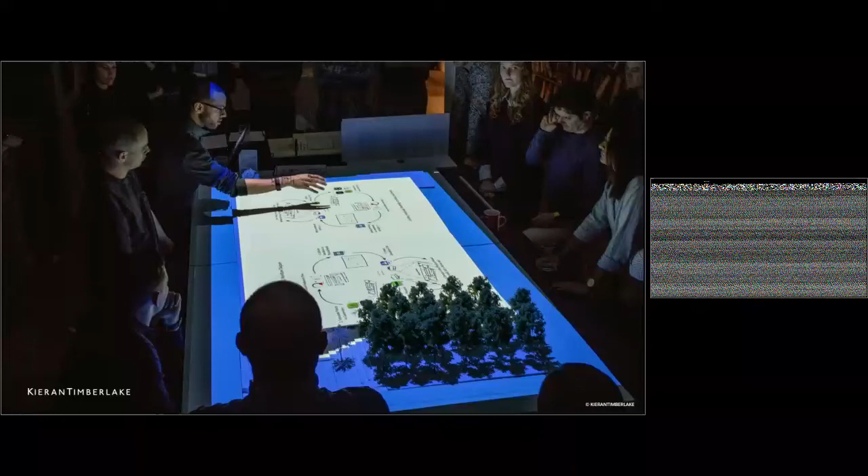My pleasure to introduce tonight's speaker. Before I do that, I just want to acknowledge one really significant detail of the arrangement here tonight.

Since 2013, we've been able to bring to the college a Barber McMurray professor. This is a result of a generous endowment provided by the local firm Barber McMurray Architects. So Blanche Barber and current personnel at Barber McMurray have combined to endow a $1 million gift to the College of Architecture and Design, which has allowed us to bring a significant internationally recognized architect to teach here in the college essentially every other year.

So in 2013, the very first Barber McMurray professor was Larry Scarpa of Brooks Scarpa in Los Angeles. And then we had Wendell Burnett, the Phoenix architect here. So just to say to the folks from Barber McMurray who are here, thank you very much, formally and publicly, for this amazing support. It's part of what helps differentiate what we do here at the University of Tennessee and brings great value to the student experience. So thank you.

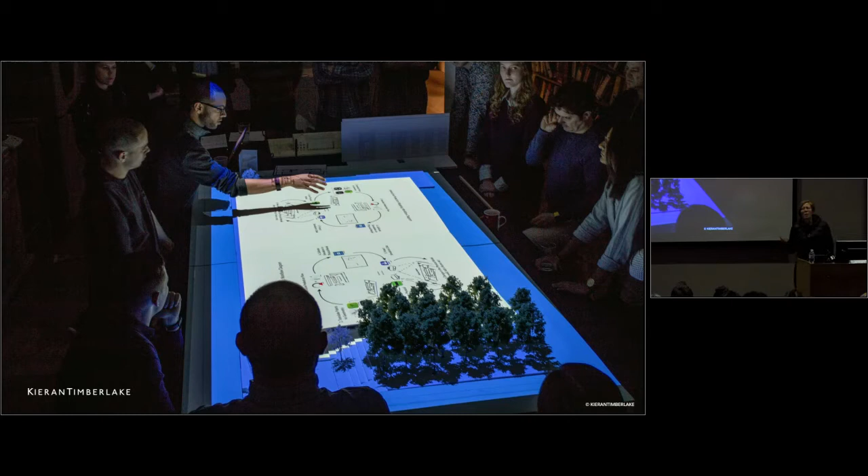If you came to our office and spent time with us, you'd see that every day we're asking how far we can extend the boundary around what we include and exclude when we design. You might see us out on the sidewalk doing things like this on a day-by-day basis. We have projects, clients, schedules, but day-to-day it's what you choose to do and how you choose to design that matters. When you allow an entire group, organization, or community to embrace questioning as part of the core infrastructure of the design process, wonderful things happen - you begin to ask really primary questions.

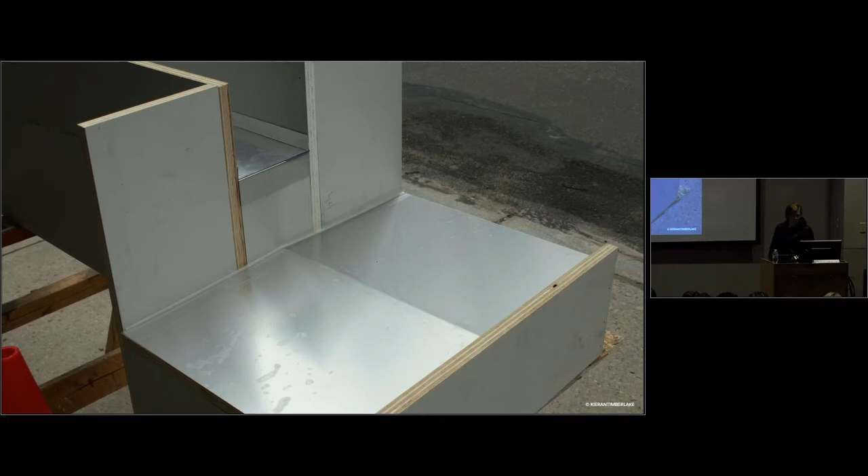That's an interesting thing. You might also find us out front on the sidewalk doing experiments like this, especially in summer - running a very quick mock-up to understand water flow across a specific surface. It's what I'd call a low-fidelity prototype, just to ascertain the slope of a surface and the speed at which water flows across it.

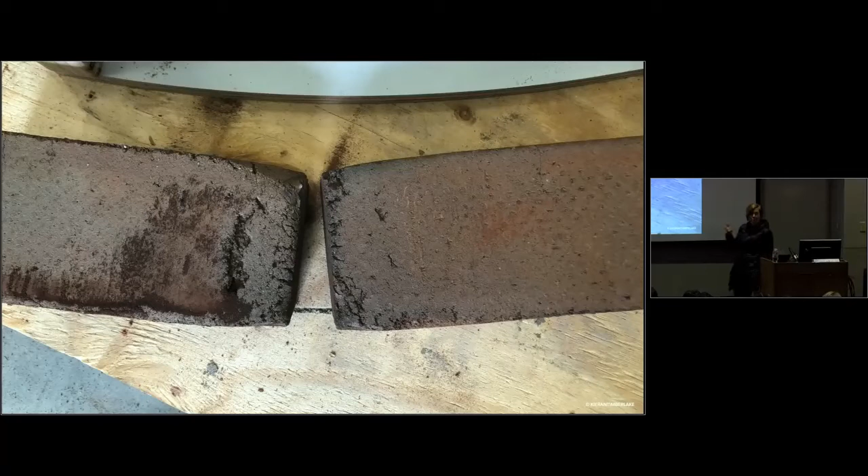More recently, just two weeks ago, we were working on masonry mock-ups in our shop with members from the International Masonry Institute - masons who came in. We were asking a really basic question; I'd almost call these sketches with bricks and mortar, about the head joint on a curve.

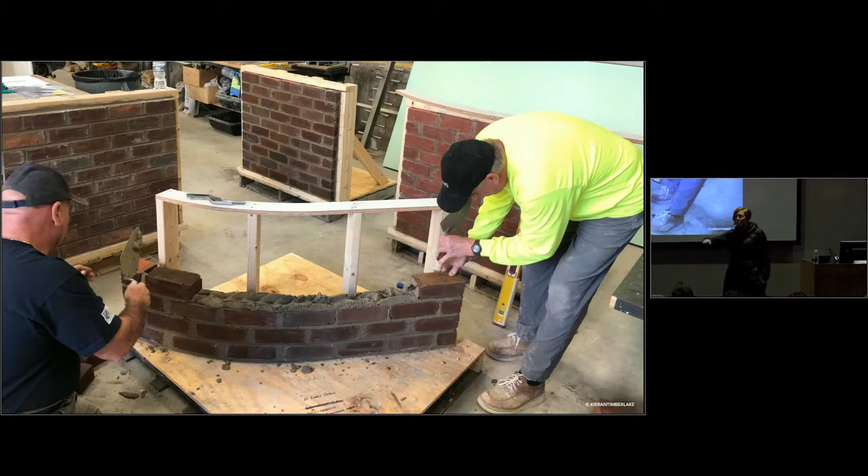And while we had an incredibly high fidelity Revit model, and we were running scripts that would allow us to adjust these head joints, we also wanted to create a prototype and go through the entire process of working with those joints as well. So we were simply using our shop as a space where we could build and work through these types of details.

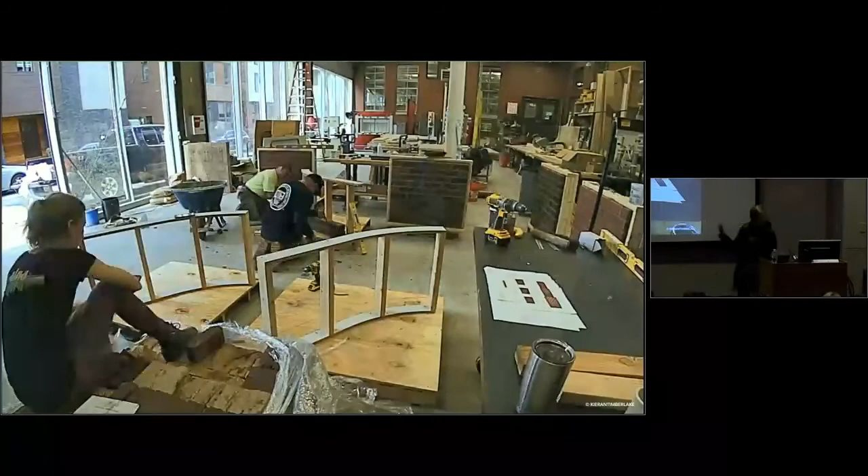I don't know, would you call this research? Does that word unsettle you a bit? Does it confuse you? If I say searching and searching again, does that feel more comfortable to you?

The truth is, I deeply believe there has never been a more pressing moment than now to test the boundaries of our design agency. And there's a reason for that. When we design, our power lies in the ability to inscribe a boundary around what we are going to include and what we're not going to include.

One of the things we're working on is really trying to understand that boundary. And one of the things we work on at Kieran Timberlake on a day-by-day basis is trying to understand the boundary that we're drawing around what we include and what we exclude, and how deeply we can understand design as a multivariate endeavor.

So when we go to work on a building like this, which is the U.S. Embassy in London, the day-to-day working out of the U.S. Embassy in London over a 3.5, 4-year period required, yes, a lot of design, as you can imagine, but also a lot of slowing down, vetting questions, extending our knowledge, going into areas that may feel a little uncomfortable.

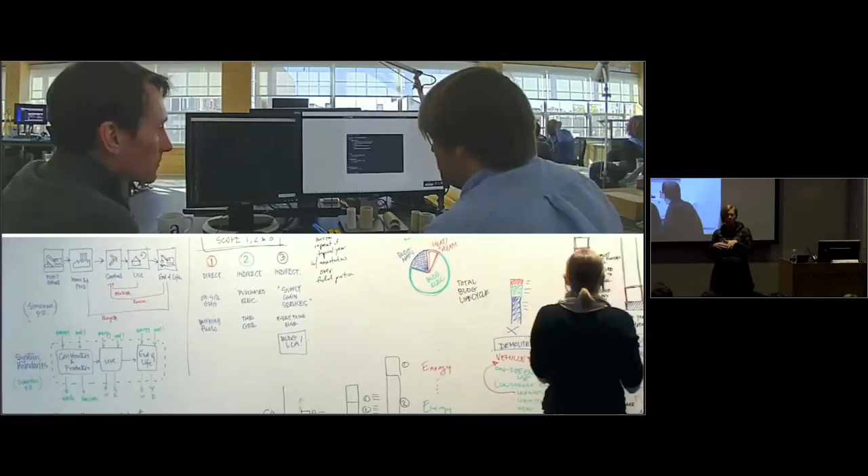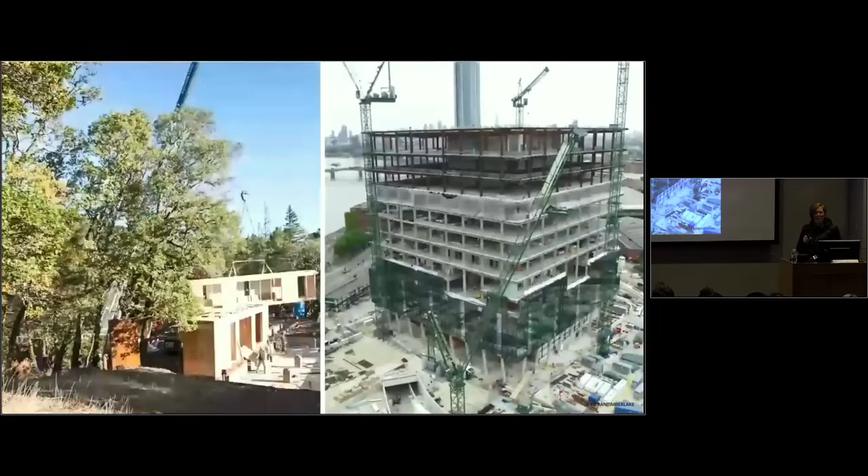You can't tell exactly what's happening. That's because we have an integrated process. When we do projects, all of those folks are at the table all at once. Everyone's there all at once, and so our projects have a tendency, yes, to look like buildings, but also to look like software, to look like scripts. I think the more important thing is that our projects have a tendency to range scales, to range concerns. We focus on certain parts of building delivery methods. We can focus on whole entire buildings.

The other observation you can make is, wow, all these questions do require a whole range of different methods to solve them, which means that, in order to extend our agency, we've had to develop those methods. So we have matured a platform of methods and techniques. Ours is a multi-method approach.

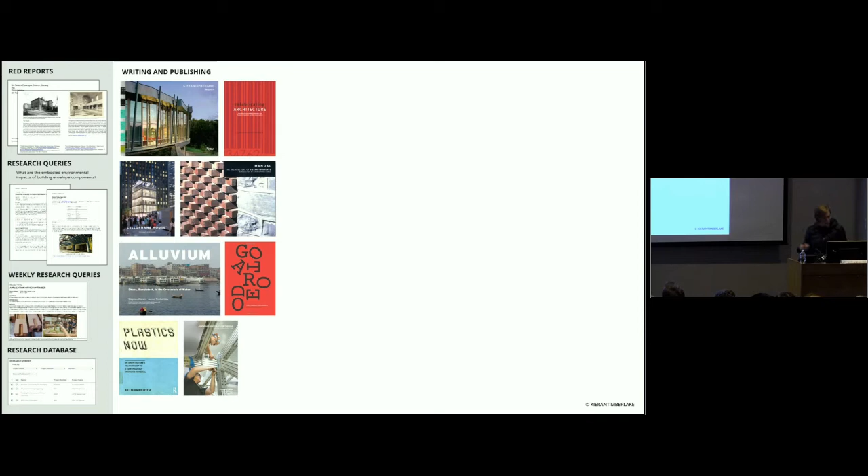We can find all of these findings in a database. But we also have ways of communicating our work, obviously through our books. It's an important part of our work is to build up discourse, especially through books like Refabricating Architecture.

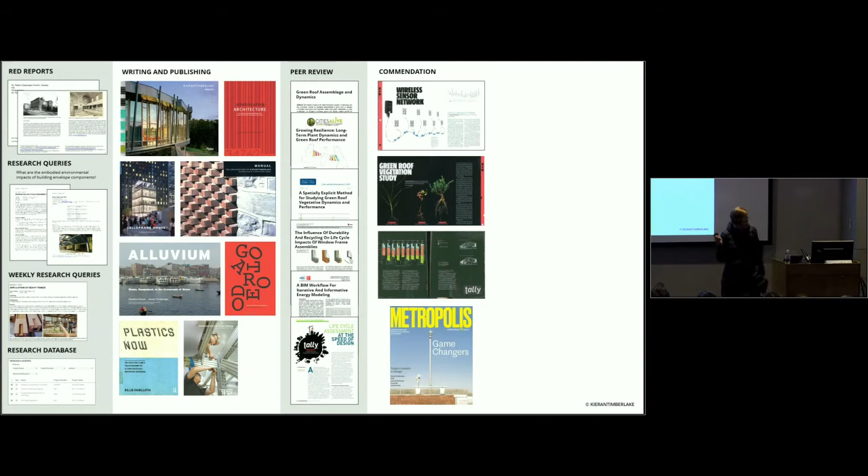We also seek review. We seek to expand the work we do out into a community of architects. That's important—share your work. We seek commendation for our work, and increasingly we seek to extend the questions we've asked into the creation of tools.

Tools that can be distributed into the profession. A simple question we began to answer in 2013: how do we calculate the embodied environmental impacts of our choices? When I select this carpet, when I select this wood base, can I bring this layer of decision making into the design process to understand what it means to pick that wood and that carpet from the point of view of embodied environmental impacts—meaning emissions to land, air, and sea.

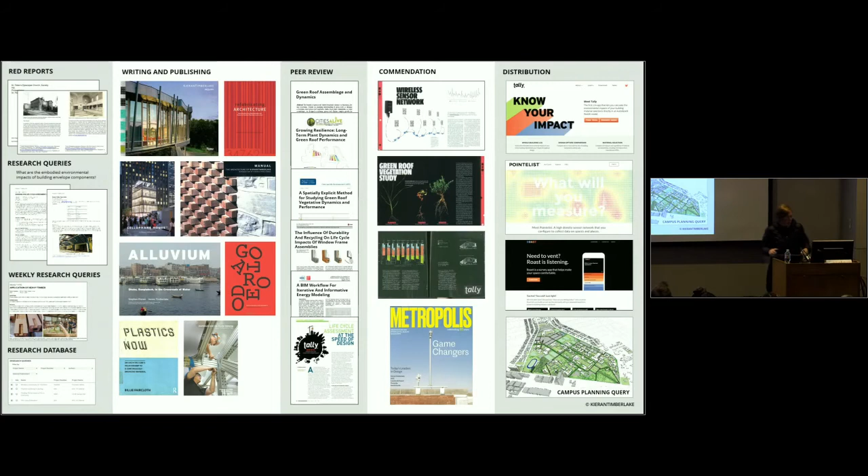Can I understand that? Once we realize we can create an environment for designers to access that data as they're designing, we can create a design-integrated process. We also begin to understand that we have a responsibility to take that novel process and make it so everyone in our profession can engage with it. Many of the questions we ask are ones other designers want to answer too, so we can distribute those.

Our milestones—and I put this slide in because I want to impress upon the students in the room that our practice, what we have worked towards, and what I've personally worked towards in my career, is designing a practice. So our milestones are intentional.

We pursued a transdisciplinary practice. We pursued a practice where research would be a process, ISO certified, meaning we can write down what we say we're going to do, look ahead and do what we say we're going to do, then look backwards to see if we did it. It's just a plan, do, monitor, learn process.

It was intentional to create a transdisciplinary group, to hypothesize that that was necessary and needed in the profession, and to go after the creation of that group.

It was very intentional for us more recently to formalize a collective intelligence-based staffing model, so that a project team no longer looked like just 'the architectural project team,' but a diverse grouping of individuals with different types of knowledge that could represent the core strengths of KieranTimberlake. This is intentional.

We were able to achieve these milestones because we intended to design a practice this way. If you build up research as a mode, and have the capacity to use research to extend your agency, you have a way of working across days, months, and years using this mode. I've had ten years of working through this mode, seeing how it plays out, and I'm now in a position of reflecting on how it has worked and what it has allowed us to do.

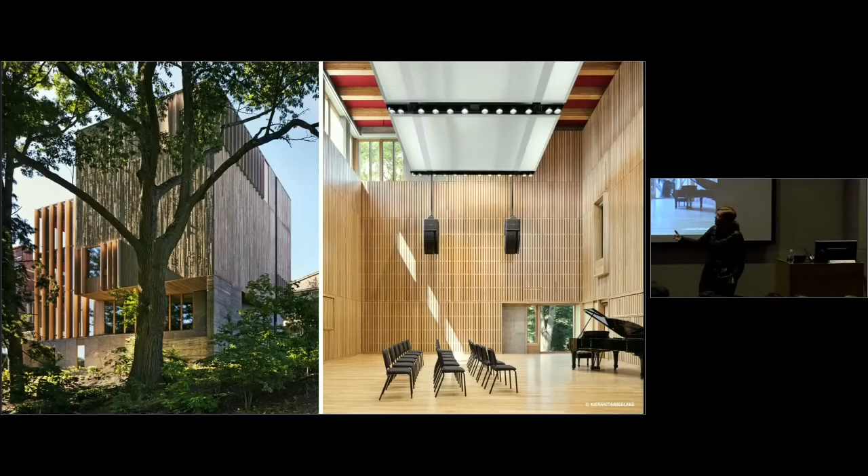We were interested in answering this question because part of the team—you talk about alchemy, Jason, you pulled that quote out earlier—part of the intuition we were using, and one of the reasons we were interested in the concrete, is because we wanted to create a bark-like texture on the concrete. Not a literal impression of bark, but a bark-like texture. The impression of wood on the exterior, and the true expression and performance of wood on the interior, in this volume where we have musicians and vocalists practicing on a daily basis.

So we started like this. We started the design iteration like this around design development. You can step back and look at these and say, these look pretty clunky, Billie. What's going on? What's going on here is that we're developing our tacit knowledge.

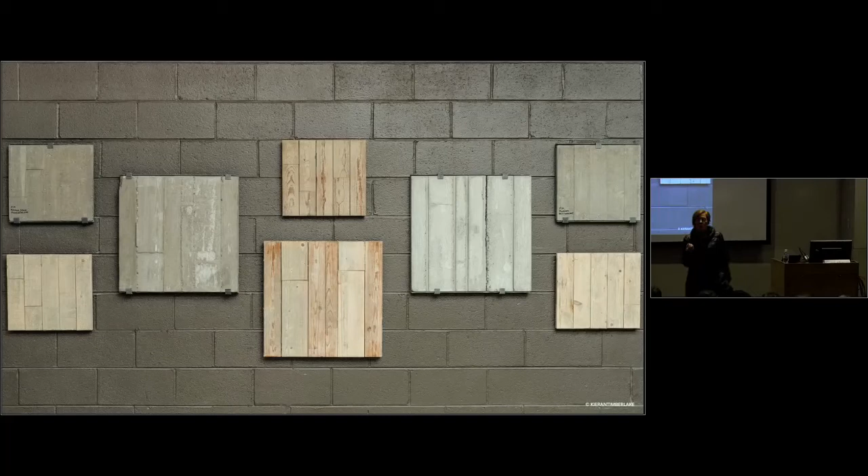We were working with concrete mix design. We were simply setting up a series of samples that would allow us to understand those variables. Each of these samples has boards at different depths relative to each other. The surface finish is slightly different—some are sanded more, some sanded less, which allows the summer wood configuration to press through on the concrete a little bit more. We also have board spacing going on, thick and thin.

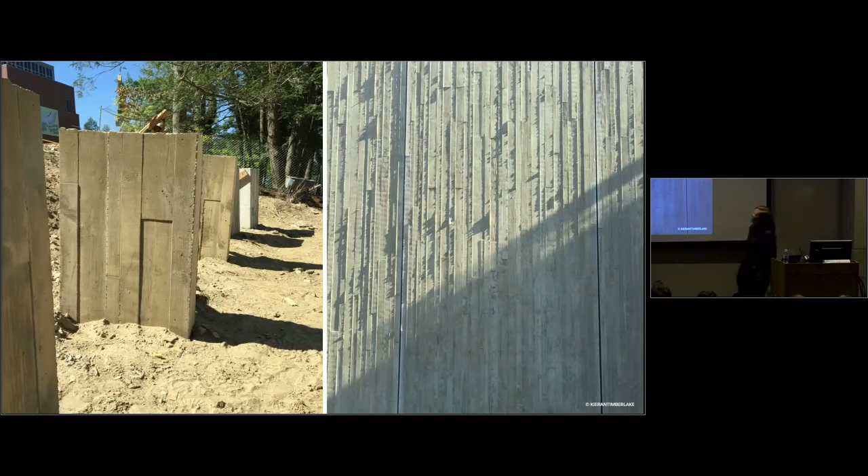But these were our first samples, which turned into tests that were initially done on site, over here on the left, by the contractor who looked at our samples. We had a discussion with the subcontractor, and there was an attempt to recreate those samples. But once we saw them on the site, we realized, no, this really isn't it. So this is the finished one on this side—this is what we were after.

So what this turned into was realizing that we needed to do a study in randomness. We needed to look at thinner boards, thicker boards. We really needed to begin to understand how to leverage this pattern.

This is when we introduced a script. After we had understood the variables we were working with and what mattered to the expression of the concrete, we were then able to better target a script that allowed us to search for a series of random patterns. We were then able to export those surface patterns and also test them, visualize them, in order to look at and study the shade-shadow conditions.

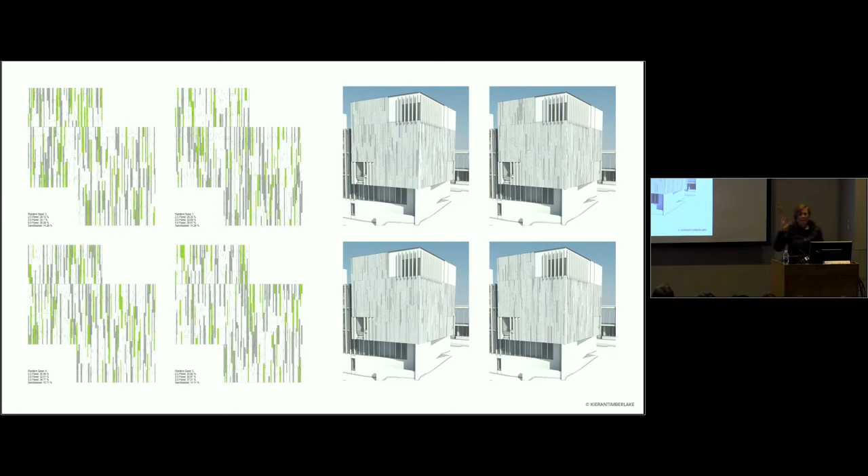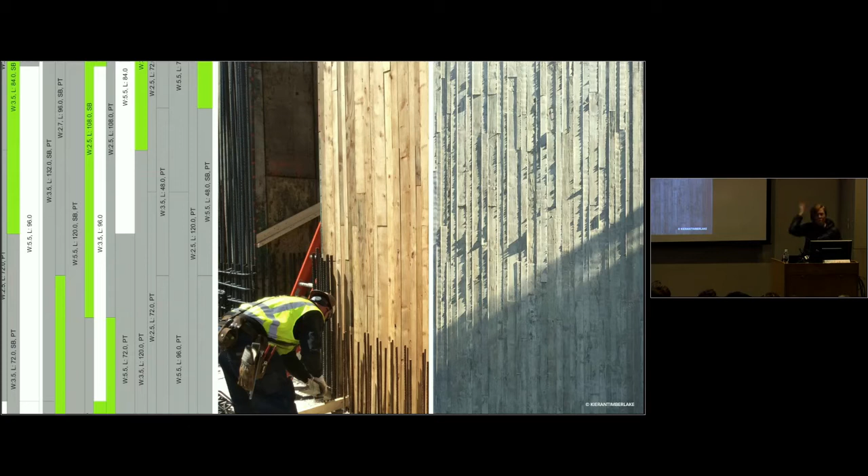What was really great about this process is that once we began to produce these almost paint-by-number drawings, they became the means by which we could communicate with the contractor. The contractor started really getting involved in helping us create new notations and refine the script we were working on, and it resulted in a series of shop-like drawings that were the means of communication—all resulting from these early explorations with these prototypes.

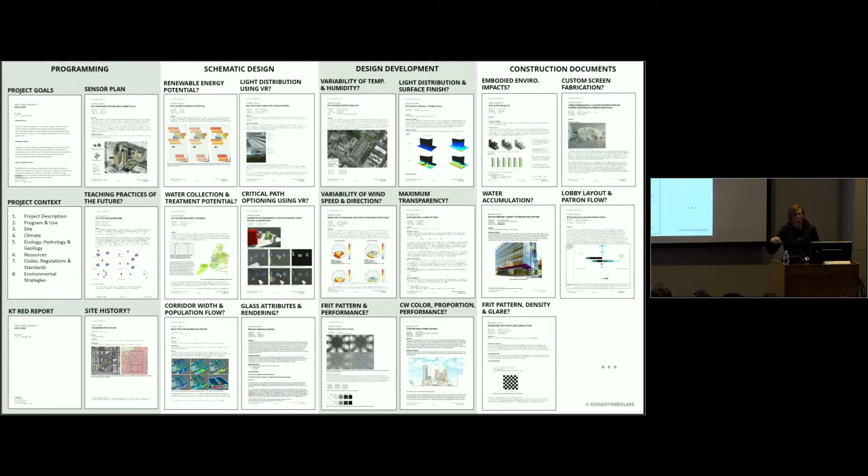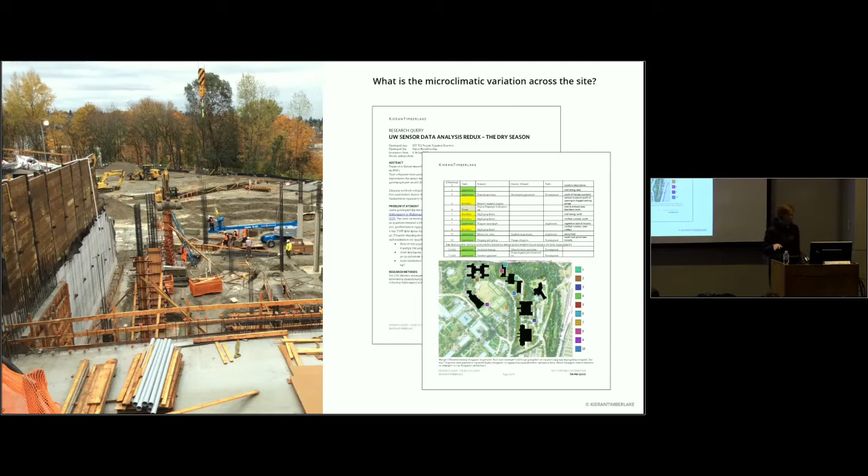So this type of nimbleness to ask across subject matters periodically is part of our design process on a daily basis, which means we can inquire about actual site conditions versus the site conditions at an airport. For this project in the Pacific Northwest, we rigorously distributed a series of sensors that allowed us to understand the microclimate on the site versus the data we were getting from the airport.

In this instance, we're able to inquire about the performance of a building envelope and understand the thermodynamic phenomena in this existing building. Propane tanks were put in by the client, and the building was heated up to cool it down. As it was cooling down, by embedding about 60 sensors in the building envelope, we were able to begin to understand the performance of that exterior wall.

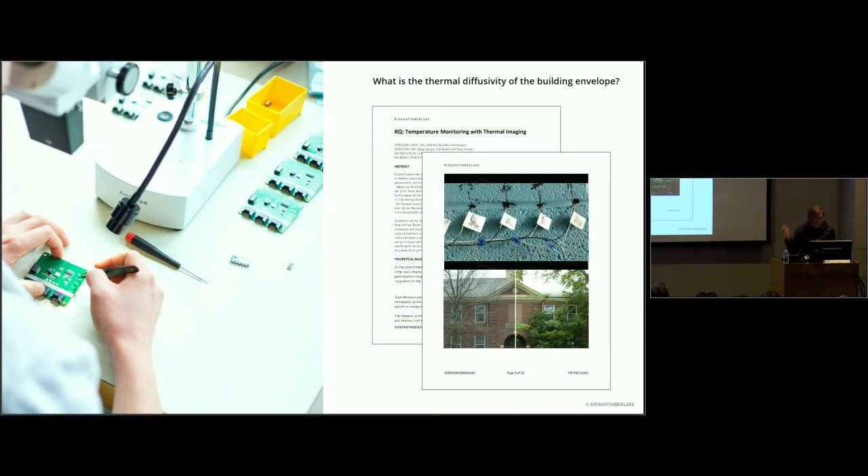Much of our inquiry deals with direct building elements and the interface between design process and designers who are, in this instance, trying to work on a screen element and fabrication processes.

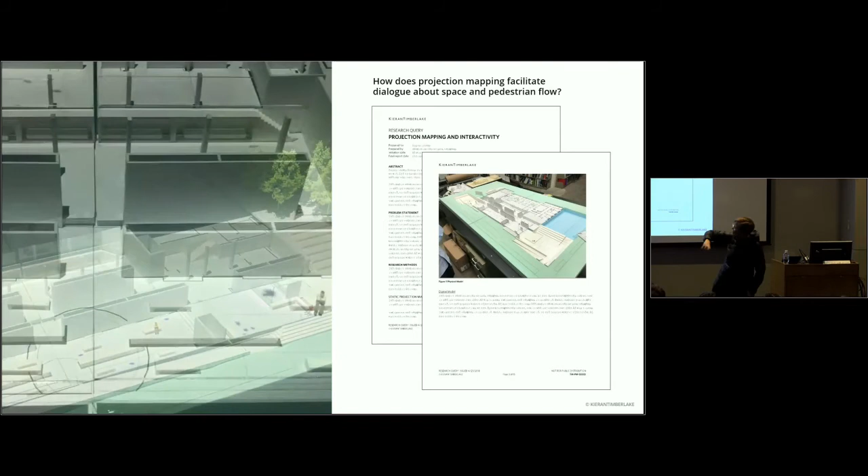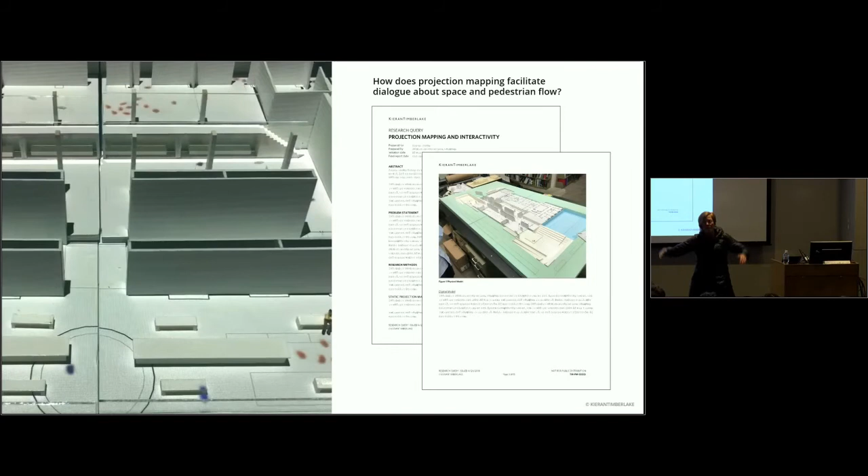Sometimes our daily inquiry mashes up a couple of different things we're interested in. In this instance, we have a client working on a gallery, and in that gallery there are specific requirements for how people traverse and interact with certain elements. We were interested in analyzing how pedestrians would flow through the gallery, but simultaneously interested in having a broad conversation with the decision makers representing the client over a gallery-sized model. That model is a quarter-scale model, very big, and we wanted to represent these different options and how people might interact with them by using projection mapping on that model.

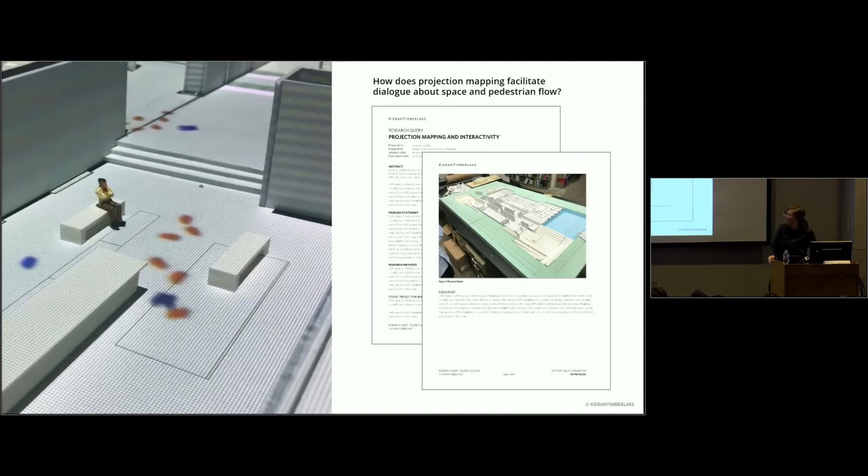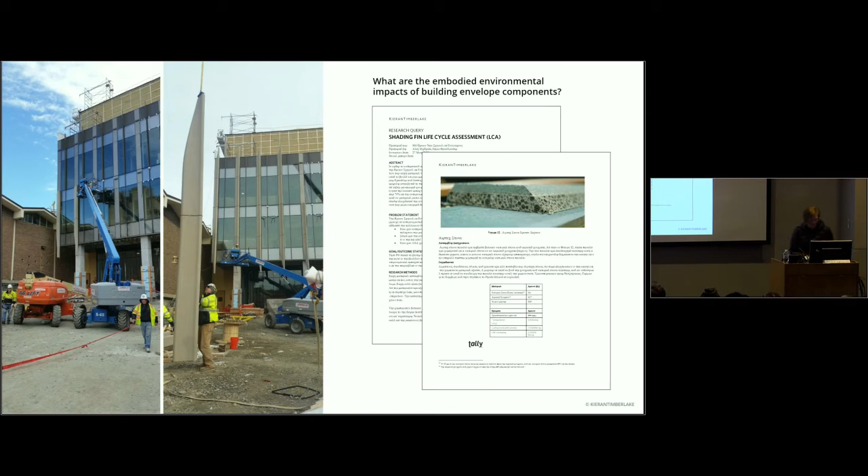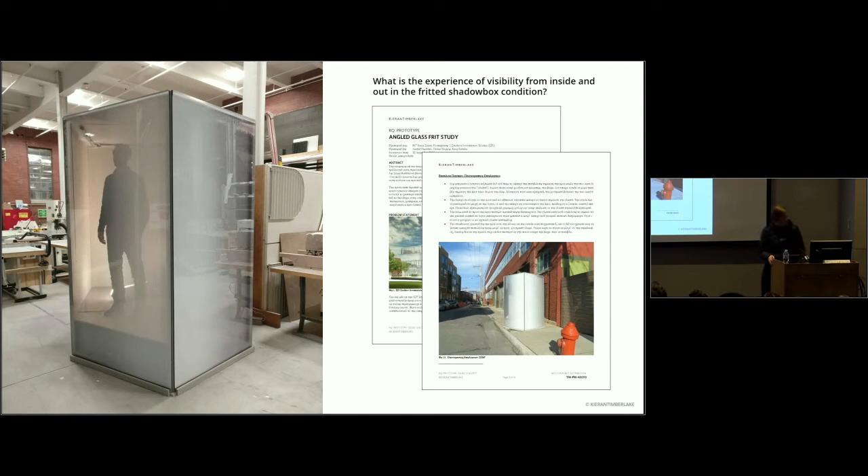Quite often our inquiry extends into straightforward comparative analysis. Here we're looking at embodied environmental impacts of these fin components at Brown University. Sometimes we're looking at phenomena like light and frit in the experience of an entire building element or component. Sometimes we're working on just the frit alone and the surface texture of that frit, asking a question about the potential random patterns of alphanumeric characters on a facade.

So the day-by-day questioning allows designers to interact with this design or research process in a really meaningful way. It extends our agency, especially when we have folks in our office with various backgrounds and methods. It's hard to figure out exactly how this happened, so we just put together this little video.

You can get a sense of the last one from the point of view of some of the folks who worked on it.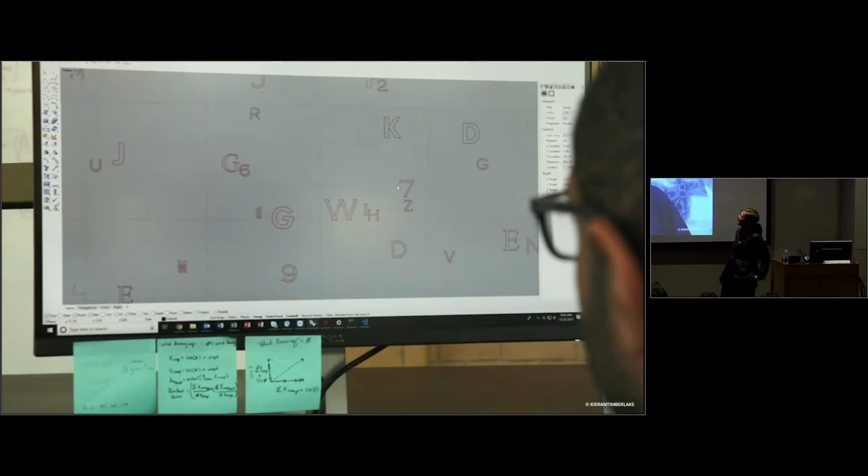So we have this east-facing facade, and we like to give it some character, but we also want to preserve the view. Fritting is a great option because of the translucency you get. We also wanted this pattern to read at two different scales: at a civic scale from all the way down to the street, but also at a small scale for the users inside the building.

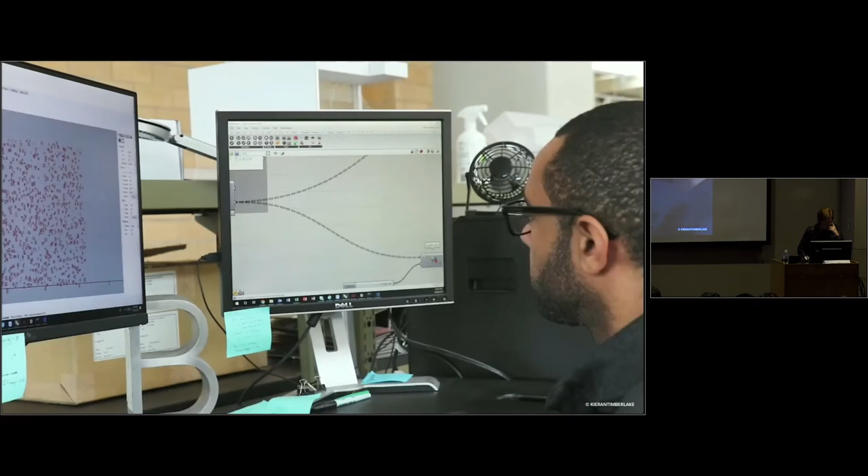For reasons relating to the history of the building, we looked at a pattern comprised of letters. To give the letters a civic scale reading, we looked at different ways to create gradients in patches that are 30 feet wide and 16 feet tall. At the densest, this gradient would shield from heat gain.

At the lightest, it would mitigate bird strike potential in the area. This project really explores what it means to be random.

We can quickly generate a script in terms of randomness, but we worked with a variety of graphic designers, architects, building performance specialists to make this pattern read in a way that is figural, that is gestural, that has kind of character. We really had to develop a language to talk about this design together.

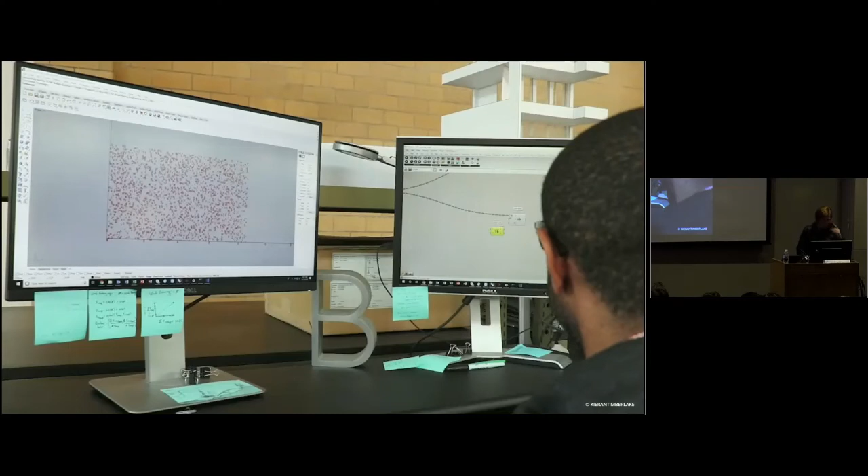I think that's where computation was really interesting, because we started off designing this by hand on swatches to kind of get that proper gesture. And so as the graphic designers started to create this pattern, in order to apply it to such a large surface, we had to unpack each step and really understand the design decisions that were being done manually so that we could apply them on a larger scale computationally.

So for a project like the U.S. Embassy in London, if we just look at images of it, I hope what you've begun to understand is that the backstory of a building like this for us is structured inquiry. That actually gives us the ability to create the effects that we want to create and the ability to increase the goals of the buildings that we create for our clients.

The U.S. Embassy in London, one of the elements on this building that received a lot of prototyping attention and analysis attention is the ETFE scrim, or exterior envelope, right over the glass on the building. Here it is from the interior and from one of the interior gardens.

But the analysis for this particular element took all sorts of forms. We wanted to understand it phenomenally, but we also needed to understand it structurally as a single layer tension membrane that had to take on a very specific shape. We also wanted to understand how to integrate photovoltaics into the surface and try to achieve something that had yet to be achieved with single layer tension membranes at the time.

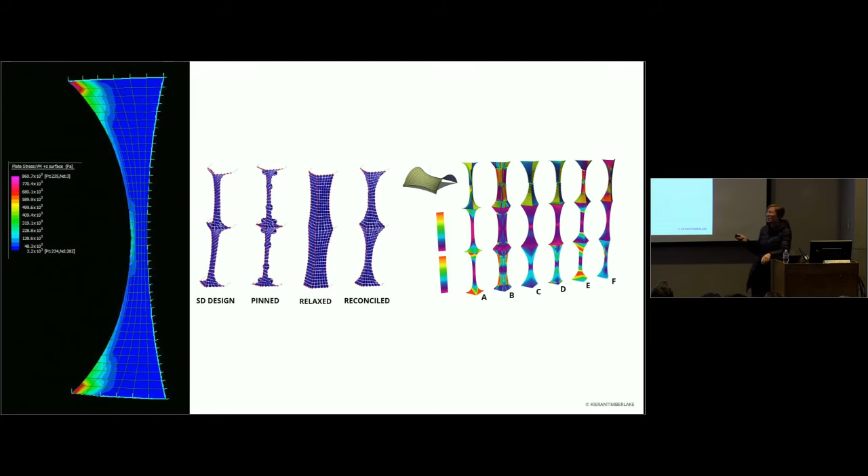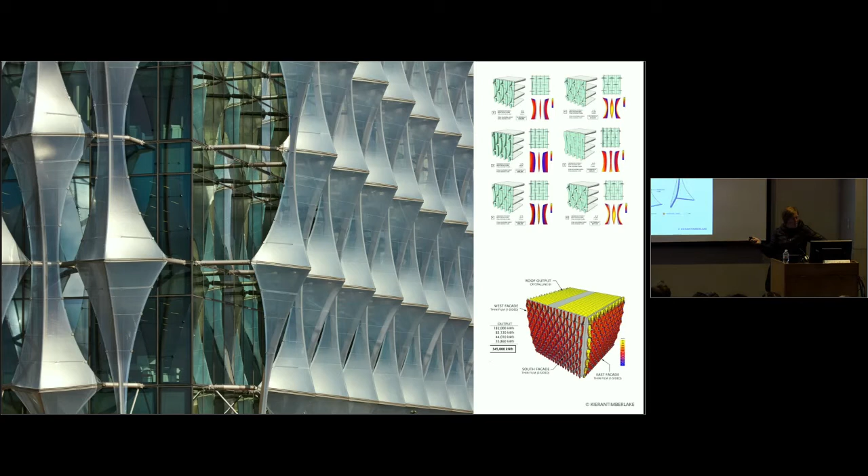Which means that we had to look at how the single layer tension membrane was stressed through different form finding exercises. We had to look at how those forms then related to the output of light, the output of energy, and look at the form in relationship to PV potential. We also had to look at the form in relationship to all the different ways of adding the other elements that stabilize the actual curve of the single layer tension membrane.

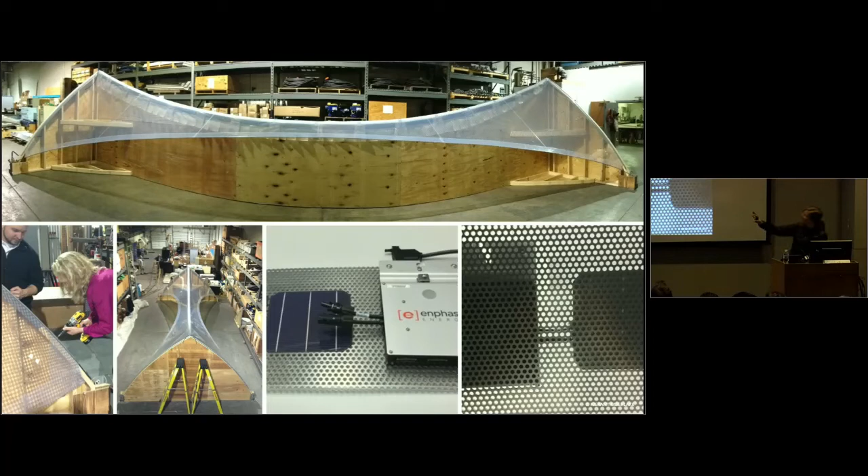This required a whole series of prototypes, both partial scale and full scale, with our partners, where we looked at the balance of system components required for the PV integration.

It also required us to step back and say that there were some things we actually couldn't test, but we could intuit. We knew that the ETFE would reflect and diffuse and refract light in certain ways. We actually had research queries that suggested there have to be ways for us to visualize this. We tried and tried, but it was actually hard to do.

And so once the building was actually built, we were able to begin to capture some of the quality from this material that we were after, and really begin to understand at scale some of the phenomenal effects, meaning that there are some questions you ask that you can't really answer.

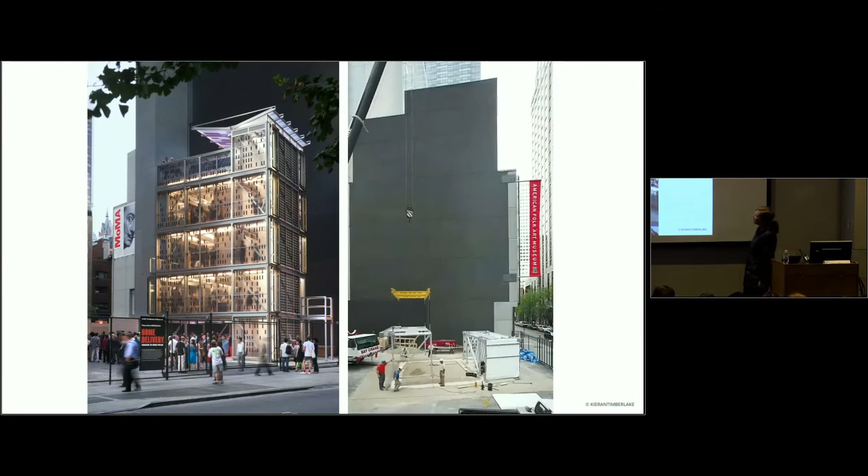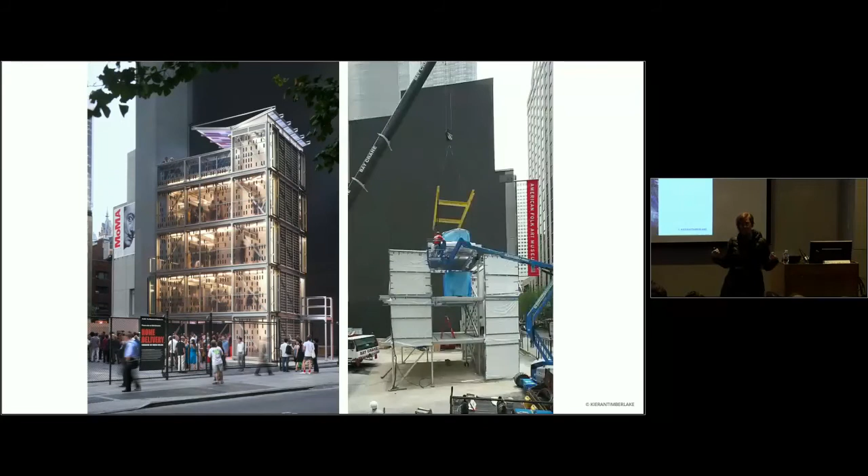But what's really important about just looking at the images of this project is that when you see images of this project, Cellophane House, it's again made of, in this instance, PET membrane stretched in a frame, integrated with thin film photovoltaics. It's a 5-story or 4-story prototypical dwelling installed as part of MoMA's home delivery show in 2008.

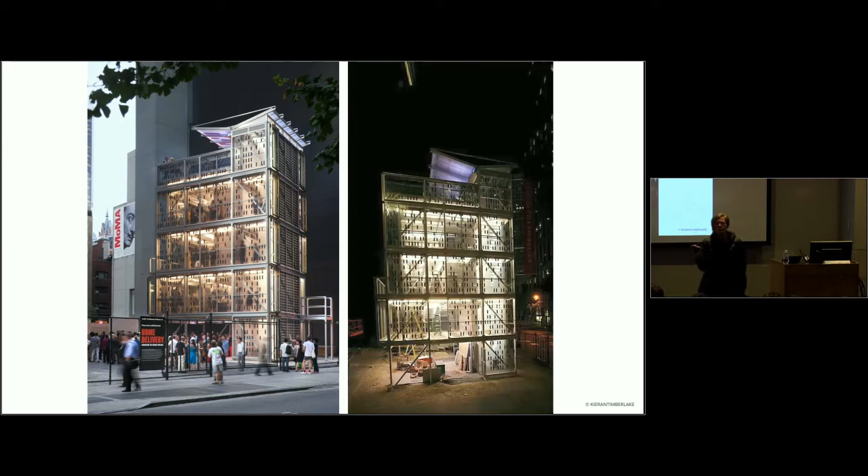This is an important moment for us. The New London Embassy just completed in 2017. I just went back in time to 2008 and showed you something with some material similarities here. I can go back in time even further to 2003 and show you SmartWrap.

SmartWrap, which is a prototypical facade. This is the working portion of it down here that integrates power, light, integrates thin film transistors. Basically, it's trying to integrate systems of a building by using a family of what are called organic printable materials on a PET substrate.

So often when it comes to extending your agency through questions and then backing up those questions with action, what you're doing is you're seeding your future work. You're recognizing that the questions we ask today, some of them we can't answer, but we can begin to build up a body of work that allows us to continue to carry that work into the future, which means that the embassy benefits from the investment we made early on in pursuing a novel material like SmartWrap.

The embassy envelope doesn't exist without the cellophane house, which doesn't exist without SmartWrap, which doesn't exist without our investment in trying to pursue these types of novel technologies.

One of the other aspects of research is that it doesn't just integrate into the design process, but allows you to step back and look at what you've created. When you look at the built environment, you probably ask: this is one big test bed. Why can't we really understand buildings? Why haven't we measured and really understood what we've created? When you take up the agency to research, you're also taking up another type of agency, one of my favorite types.

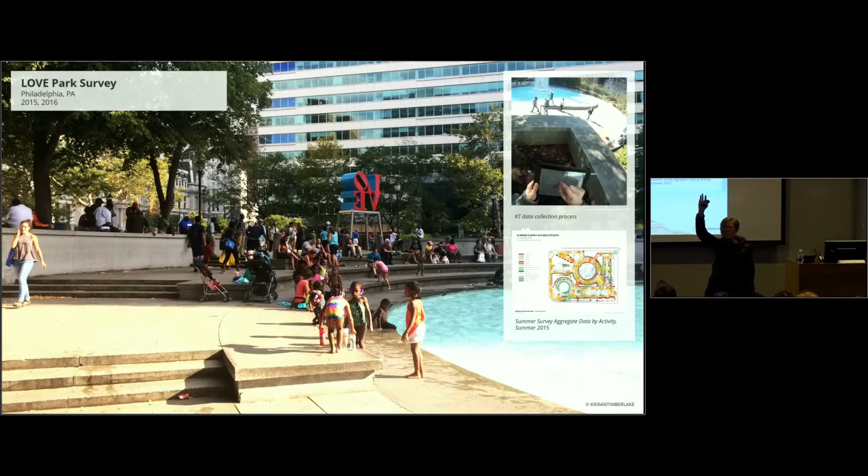We did this at Love Park in Philadelphia. We made a proposition to the Fairmount Park Conservancy, and to the city, to simply go into Love Park. How many of you have been to Love Park? Old Love Park, new Love Park - some of you might know it has been completely redesigned. But Love Park is a thriving open space in Philadelphia, a really important space in the center of the city. It had very mature trees, a mature series of vegetative areas around the exterior, and it's always a thriving place to be in the city.

It was simple: create a survey methodology that allows us to understand the relationship of people and space, mark those people in space, census the space, understand the relationship of trees to materials, to people, to their activities, and simply look at the data to see if we can come up with some conclusions about the relationship between all of those multiple variables in open space.

That project translated directly, a year later, into a similar set of questions about the factors that contribute to interactions in an urban emergency room in Philadelphia. We worked with JeffDesign, I think the only design thinking program for future medical doctors in the U.S., founded by Dr. Bon Ku. He saw our Love Park study and said, I want you to do this in my space. I want to understand how healthcare providers and patients interact, because I'm always trying to modify my rooms - things aren't in the space they should be, I have patients in the hall, I have real problems. Can we just describe what's going on here? The power to describe is one we should take up again and again, in order to know what we've done and what we've created.

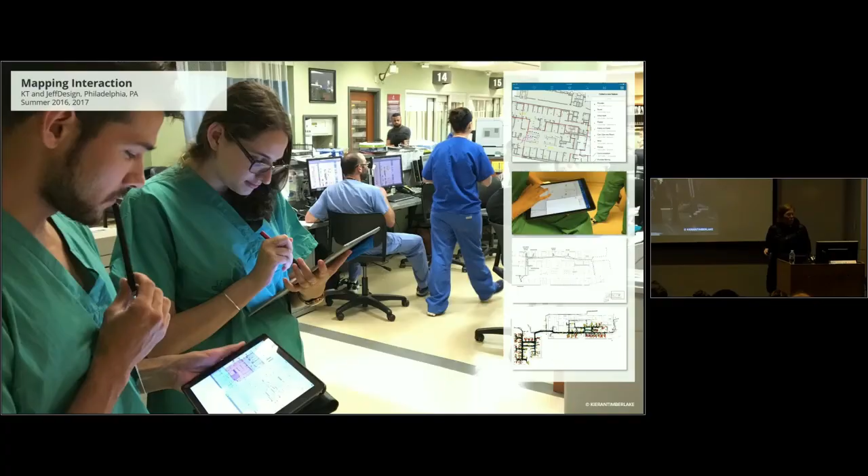Again, we can extend this power to characterize to some really in-depth studies, like this study on our green roofs. Our green roof vegetation study allowed us to go back to a whole range of roofs, about 8 total, that we had designed. This study originates from the question: what's going on up there? We're really trying to understand the relationship between all of the engineering layers under this thin layer we like to describe as just a green line - all the vegetation. We're trying to understand what's going on under there versus on top, because we noticed a roof we designed 7 years prior, across the way, that was out of control in terms of growth.

And we began to realize, wait a minute, we planted 6 species, but that looks more like 65. What happened? What's going on?

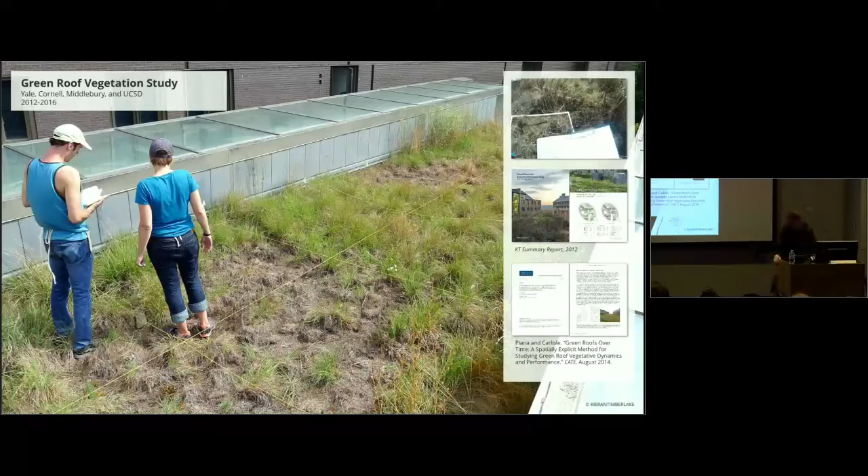Recognizing that when you have such an amazing amount of biomass, all of a sudden the way you think about the thermodynamics of that roof changes, and the way you think about water begins to change. Going back to roofs like this and being able to create data like this, 2006 had 6 species, later 12 or 13. It begins to give us a way of thinking and characterizing what we've done in relationship to solar regimes and drainage regimes, realizing there's a relationship between the form and slope of that roof to the vegetative cover, species richness, and biodiversity of the roof.

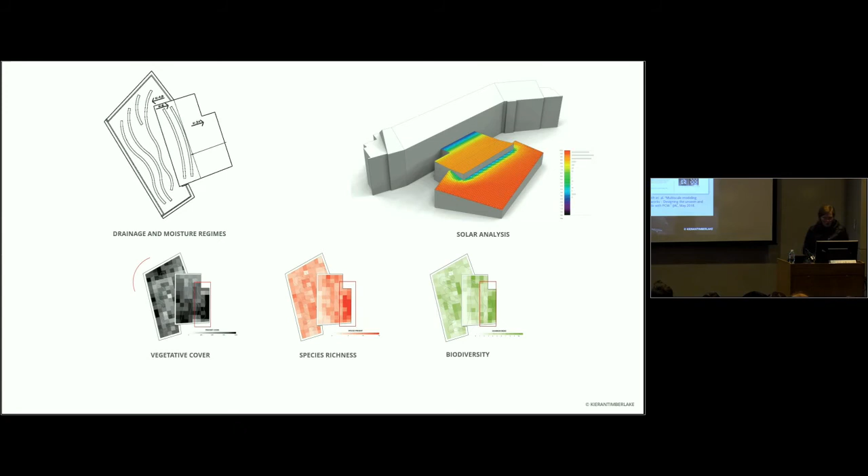Often we're trying to describe the nature of something. That is true for this project as well, a project we did at the Royal Danish Academy of Fine Arts Center for Information Technology and Architecture. We were working with a group within a very broad transdisciplinary team, specifically with phase change materials.

It was a simple, complex, and complicated project because we were trying to fully couple a prototype embedded with about 60 sensors to a simulation of this material turning solid and turning liquid. That meant we had to know the physics associated with the flow of that liquid once it was liquid, all of the material properties, and something about heat flow. We were working closely with someone who understands the first principles of thermodynamics, simply trying to couple a physical prototype with a digital model for a very specific reason.

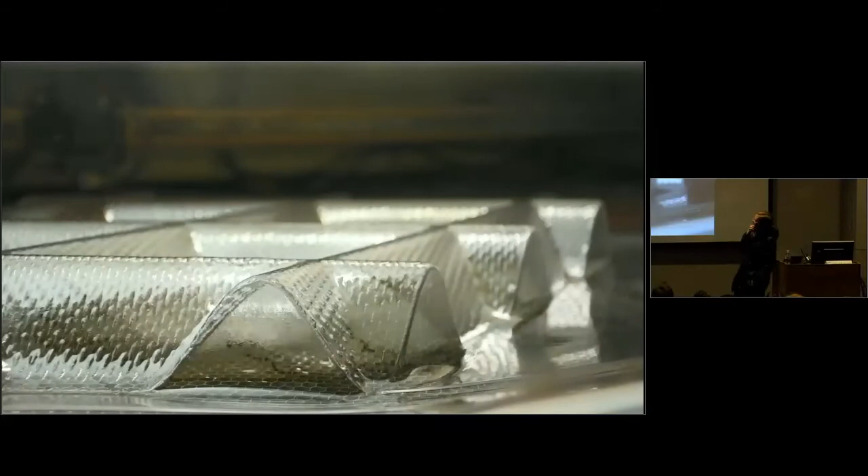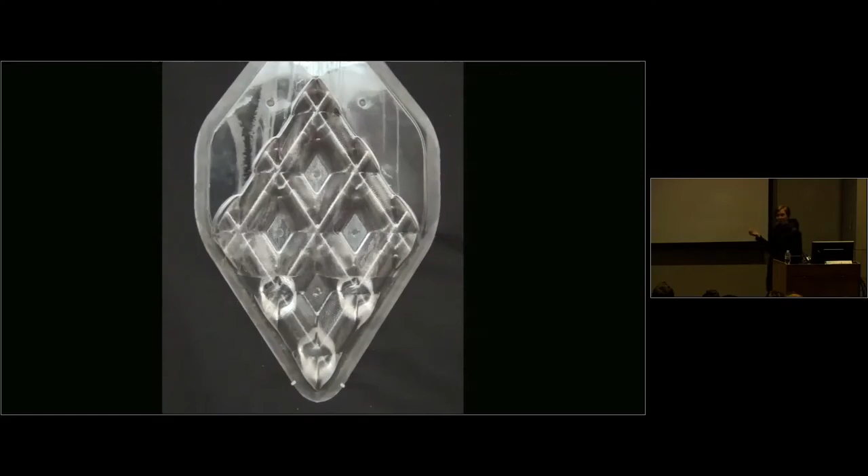But this is simply what's there, really straightforward. It's a series of vacuum-formed shells, filled with phase change materials in liquid form. Phase change materials are programmed to go from solid to liquid at a very specific temperature, and they hold that temperature for a very specific, pretty interesting reason.

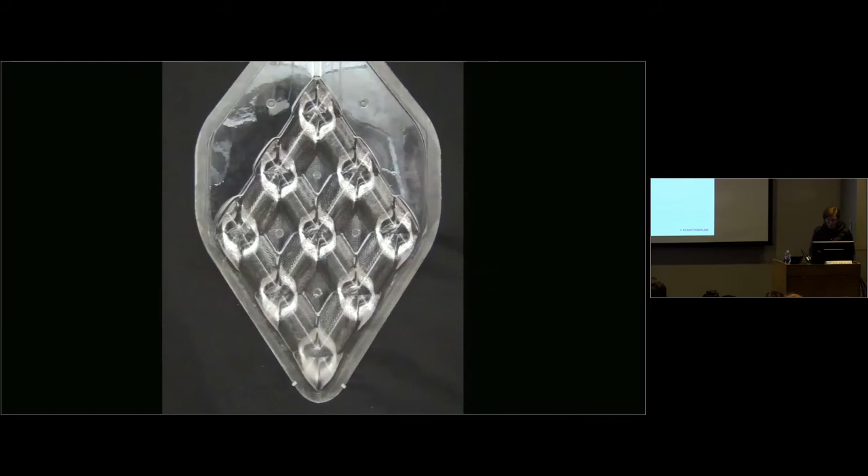We were working with prototypes in 2 locations because some of our partners are in Copenhagen, some in Philadelphia. You can see all the sensors in that surface, and then those sensors are geolocated, the prototype is geolocated, and they're fully represented in a digital model. We're getting readings off the sensors in 5-minute increments.

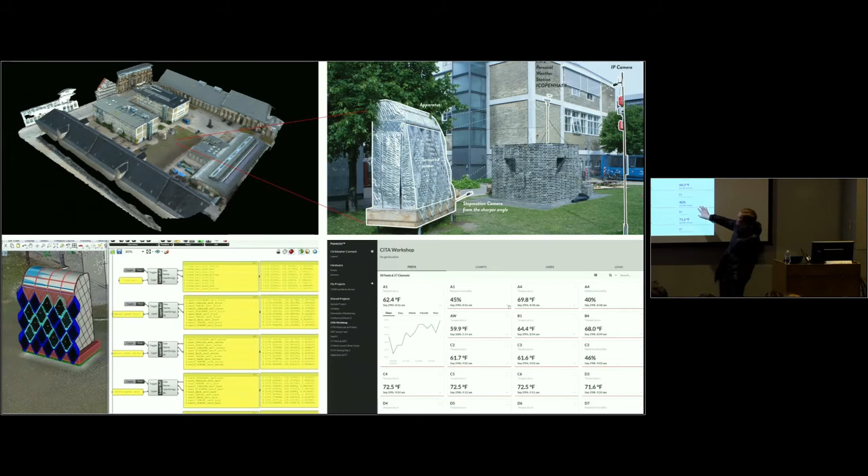We're adjusting the test bed, and what we're simply trying to do is figure out what's going on over there at really specific time steps. Because we've also created a virtual version of what's going on over there, and if we have both side by side, we can get this digital version to be really accurate and represent a really complex phenomenon of phase change.

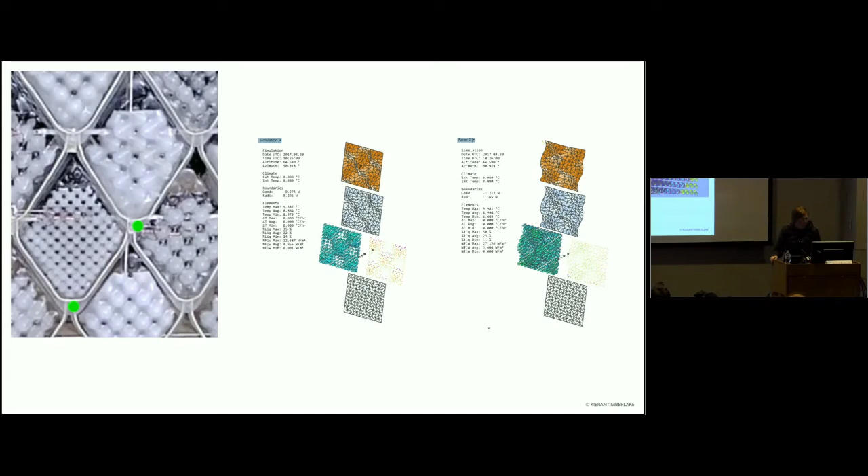And if we can create a digital version of this, that means we can give this simulation platform to anyone in this room, and you can work with complex phase change phenomena. Ultimately, you begin to create surfaces and surface effects that are quite intentional, ones where you're able to say I want to create a surface that goes from a complete hatch, that's the white, to a series of dashes, to a series of dots.

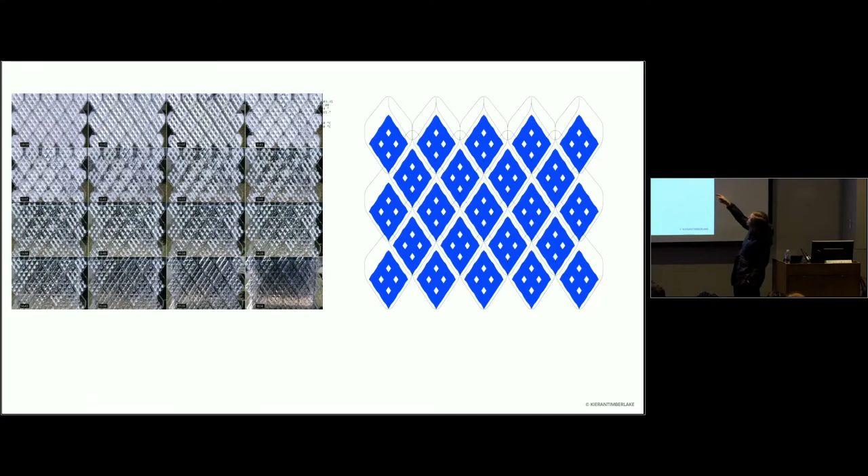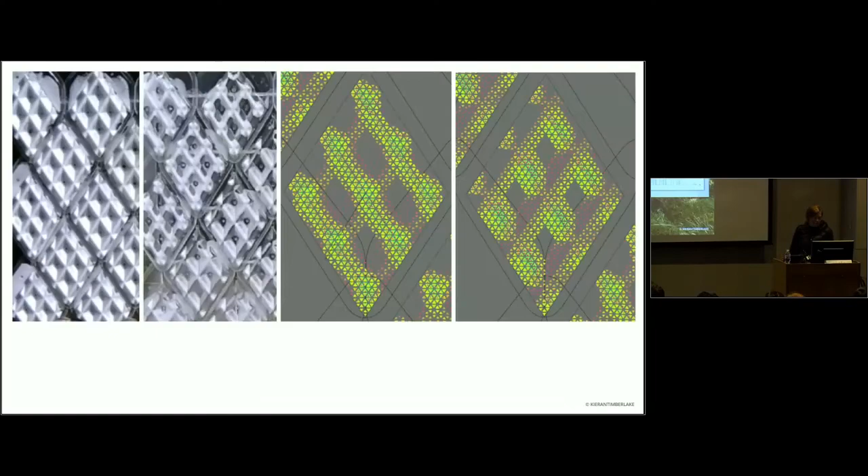Can we control the geometry now that we have a calibrated simulation platform? Can we control it so much that we can run through a series of simulations and search for forms of those shells that would result in a hatch dot dash pattern, and understand how that pattern happens over time? Coupling real-world phenomena with simulation extends your agency, it's a way of understanding how precise you can be, how much play there is in a system.

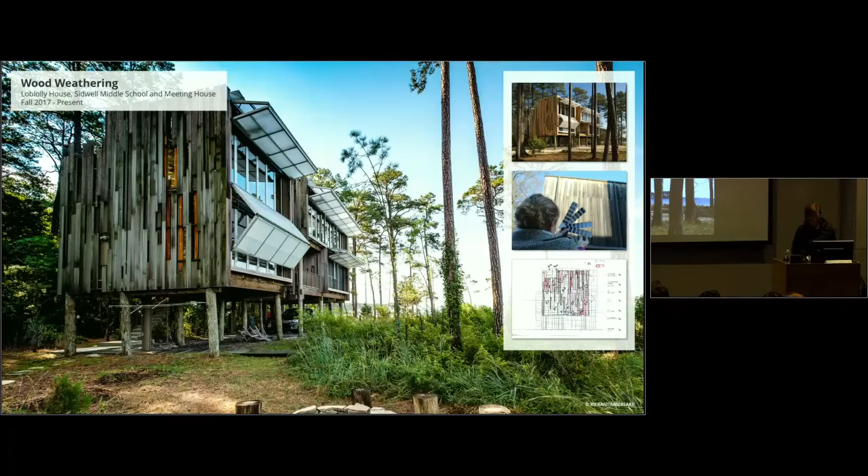The same is true, we're doing something very similar with the Loblolly house. This is the Loblolly house last year, and this is what it looked like when it was built. You notice a difference? I'll go back. You notice a difference?

Yes, the wood is weathered. Now, what do you think? Should we even go here? What if we could control or understand how wood weathers? What if we could simulate how wood weathers? We actually asked that question, could we simulate and then begin to control it? Well, all we're looking at is color change, simply looking at where coloration occurs and why. And it turns out it's driven by wind, UV exposure, and water—phenomena we're familiar with.

When we begin to look at the Loblolly house, there's a whole range of experiments embedded in this house: an experiment of reorganizing a supply chain, of building it out of one tool, of working with chunks and panels, of actually saying, well, at the end of its useful life, we want to be able to return it back to the forest.

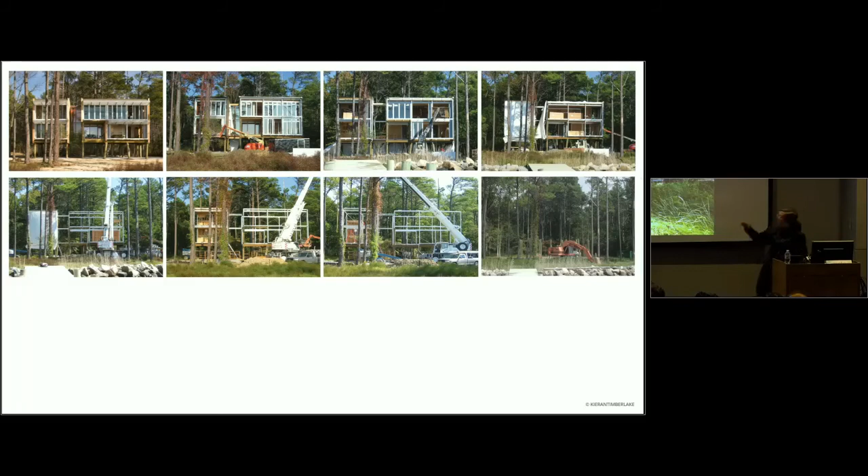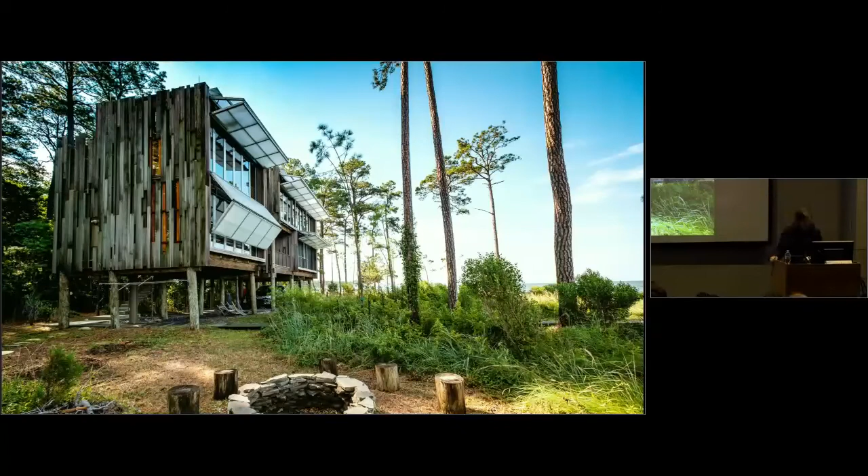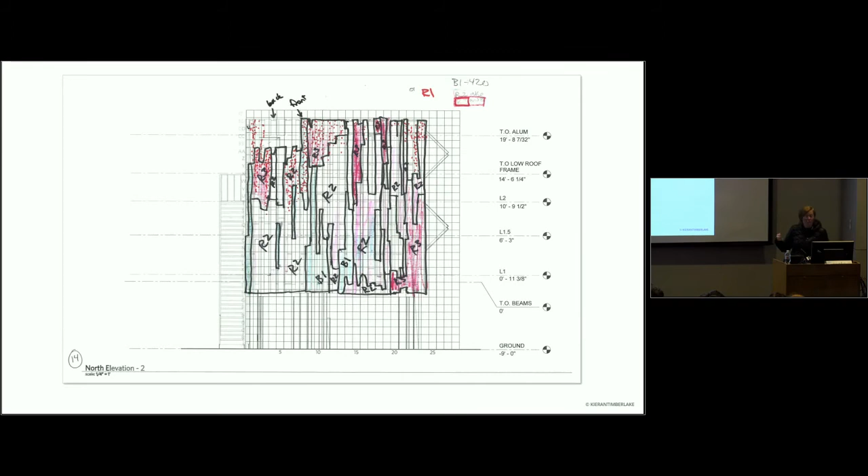This experiment begins to suggest that we could go back to the Loblolly house, really survey and create useful maps of coloration, and begin to take a very rough sketch of a simulation platform that predicts wood weathering for another building, and turn it into a more precise simulation platform that would look at this phenomena board by board.

That's really where we've taken questions like that and extended those questions into platforms for designers in our office to use, and for designers in the profession to use.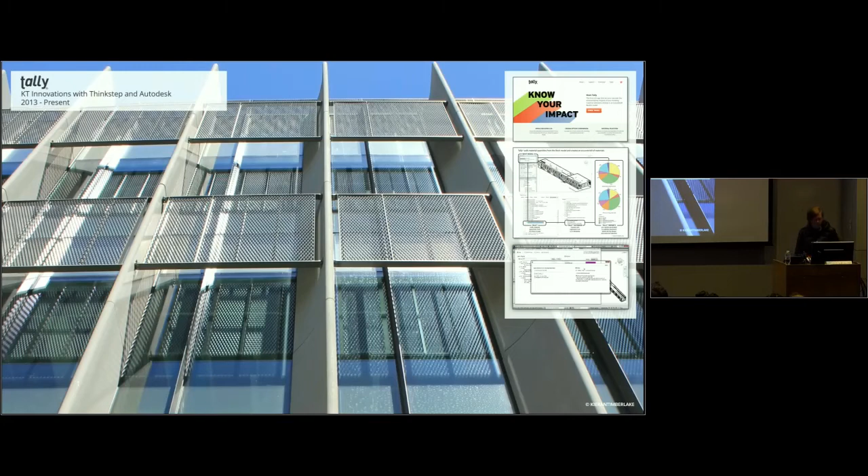So as I mentioned earlier, when it comes to a software like Tally, simple question: what are the embodied environmental impacts? Can we measure them as we're designing? We said yes, we were able to answer yes to that question, and then develop a robust method based on life cycle assessment to do that. Often, these types of platforms start out as these types of projects.

We actually just completed this really quick sketch just last weekend. We called it Holy Frit, which is supposed to, I guess, elicit a laugh. But you probably noticed, like, wow, you guys do a lot of research on frit. What's going on? What's that discussion like?

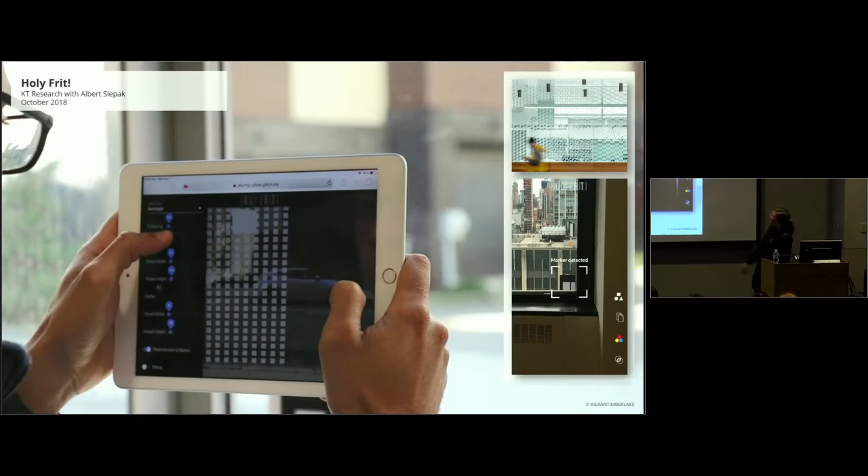Well, people keep having this discussion: what if we can use augmented reality, do a really quick proof of concept of a tool that would leverage AR through a web-based platform, allow designers to look really quickly at a series of patterns, either image-based or geometry-based, and just simply begin to iterate through using more of an AR platform on glass to understand those potential patterns.

This is a proof of concept tool. Proof of concepts often look like this image right here—you can see iteration after iteration, a long project, 2013 to present, of trying to provide a platform for us to collect information, collect measurements in space: a high density, low cost sensor network that provides real-time information on phenomena that's occurring in spaces.

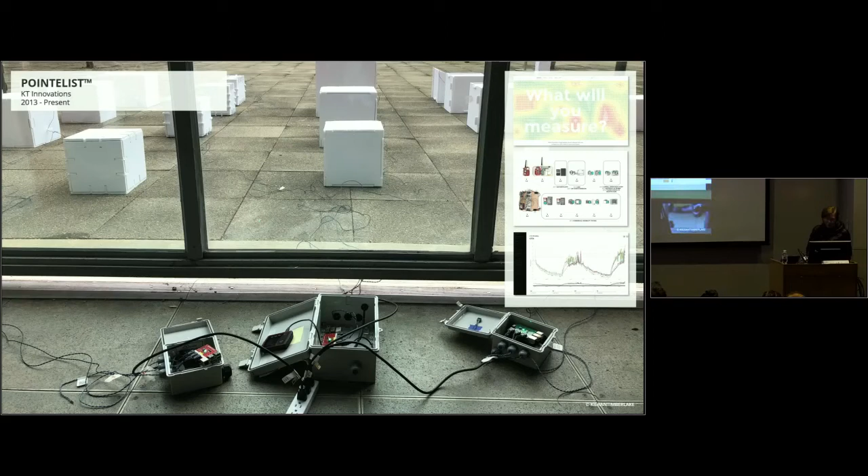We've tested this with about 25 different architects. More recently, we're just launching this tool that's going to allow our profession to organize post-occupancy evaluations, and more specifically thermal comfort surveys, where people are asked a range of questions, and their answers are actually mapped to the exact location that they're in their space.

So not only do we get data about how they feel, how hot they are, how cold they are, if they like the brightness of something or if they don't, but we also begin to get a map of a space, and you can begin to define microclimates in this space. You can begin to see, well, wow, people over here are a little more cold than the people over here, they're kind of hot—what are the factors that are contributing to that?

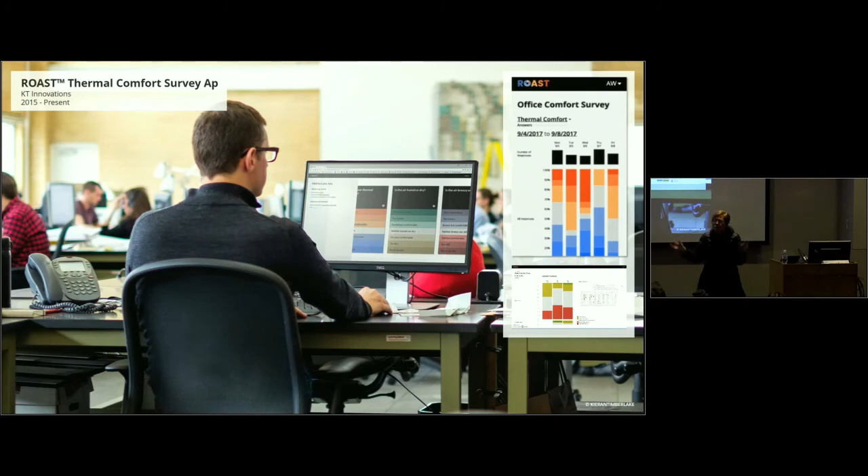These are platforms. And this is the final project I'll show you: a construction logic platform that we're developing for India. This is equally a platform, one that's a construction system. It's comprised of about 5 different components.

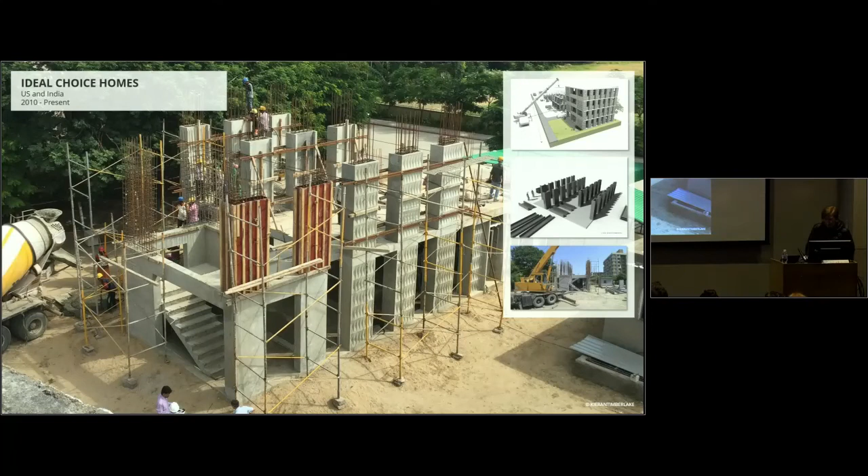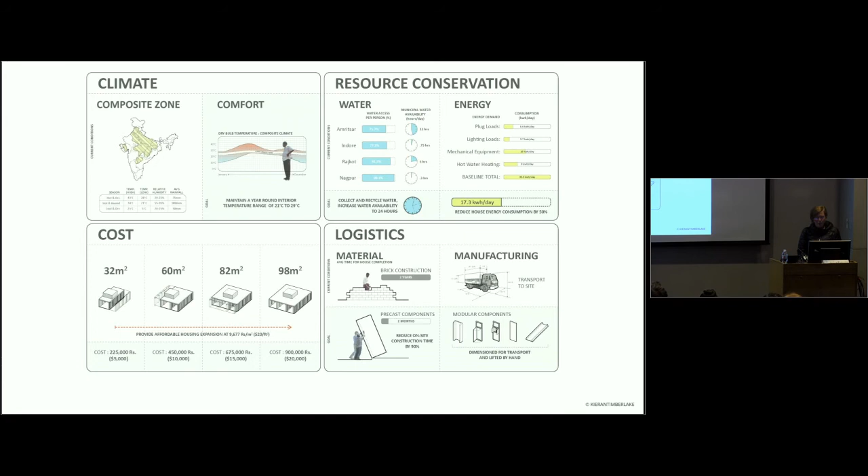It's trying to take what is a more normative cast-in-place frame logic, or a frame and fill logic, where you have cast-in-place frame with masonry, and address a whole range of goals related to climate, resource conservation, cost targets, logistics and material handling—compressing all those goals into 5 really smart components, the smartest of which is a column component whose depth and width allow it to be a column wall, and permits a certain amount of self-shading.

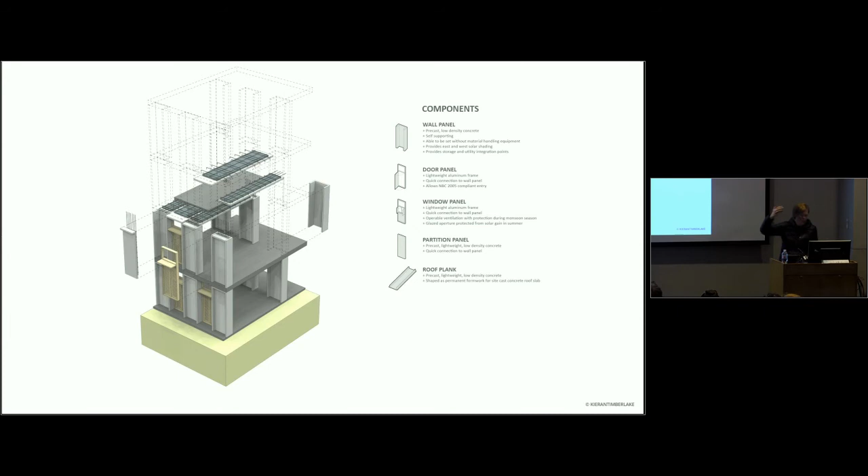All of this has required a range of research in terms of construction logistics in India, material availability, but the system is nonetheless vertically and horizontally expandable. The range of queries we've done here include mix design for concrete around all of the different aggregates available in India, especially since we were trying to eliminate initially material handling equipment, so we're working with a whole bunch of lightweight materials and doing a series of mix designs on lightweight aggregate.

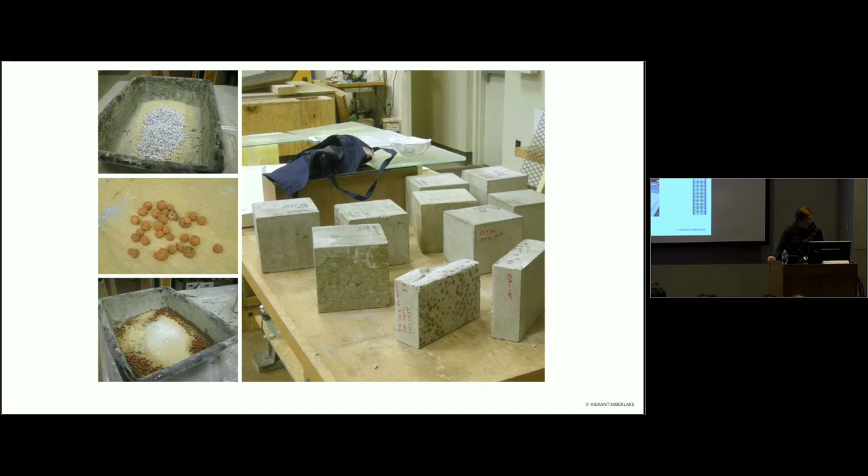It also required us to invest in pattern seeking that would increase the amount of self-shading on very specific surfaces that were going to likely receive a lot of sun.

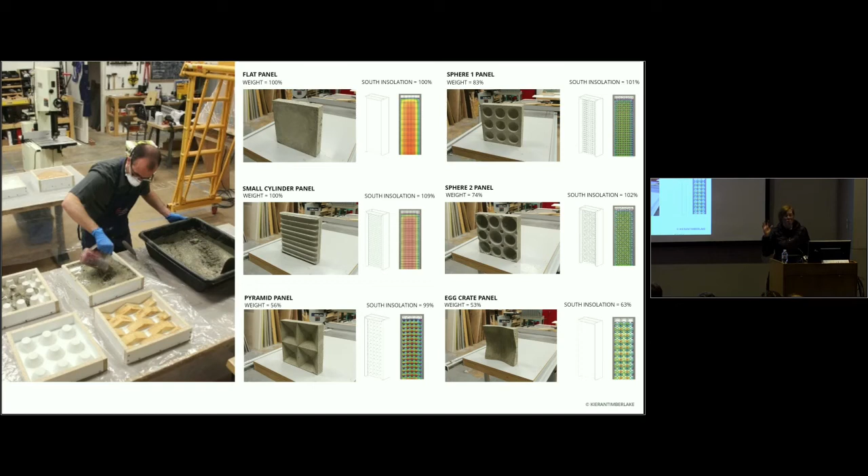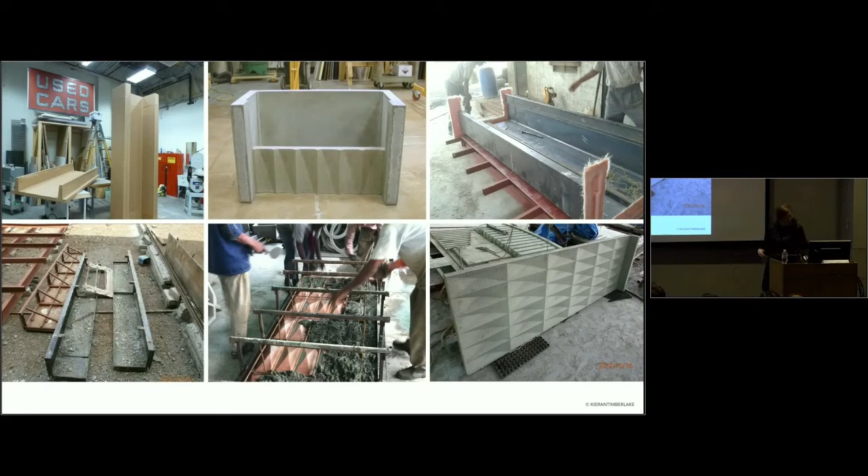It required a lot of prototyping back and forth between our partners in India and our shop in Philadelphia. Component by component, we built up a prototyping protocol until we were able to realize our first prototype in Ahmedabad.

In 2013, and in this prototype, every column you see there is a different mix design. We're testing 5 or 10 different things at one time when we were building this initial prototype.

And then more recently, in the image that you saw at the outset, we were able to test the horizontal and vertical expansion of the prototype.

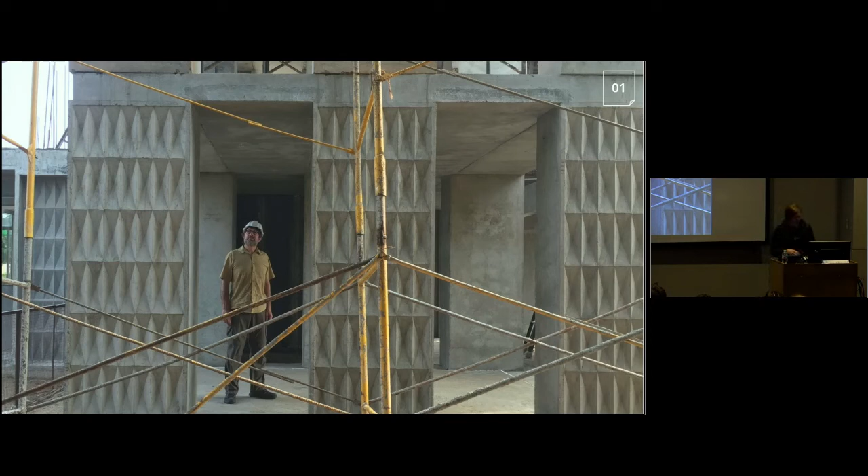So why do we research? As I mentioned at the opening, there's never been a more pressing moment than now to test the boundaries of our design agency, and I really do believe that. We research because research increases the agency of the architect, which gets me to my final couple of slides.

I just want to mention briefly why we're doing what we're doing, or give you a sense of what we're doing in our studio. Our studio is really trying to take up this question of expanding design agency and testing the boundaries of our design agency.

In our studio, we recognize that we are awash in a changing climate. We're overwhelmed by a material glut, and we wonder what, if anything, our form-making powers amount to when they are meted out one building at a time.

So you have to ask this question when you look at the range of things that you can do, but the smallness of architecture. Can something small like architecture make a substantive impact to correct our course? Will something large, like a global industrial building materials complex which includes extractors, processors, and manufacturers, reset pace and purpose?

Now, I wrote this because one day on my desk an article showed up, published by Building Green, titled 'The Urgency of Embodied Carbon and What You Can Do About It.' I was just in the midst of teaching this studio and working on the subject with several students in the audience.

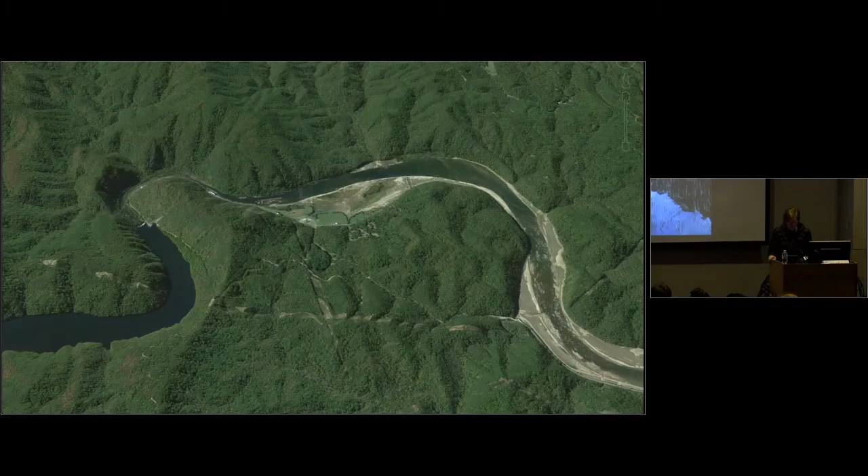The first site, the land, is set aside for materials extraction. The second site, the factory, is a place for materials processing and manufacture. The third site, the trailhead, is home to the center of land use history and ecological interpretation.

At the trailhead, the center for land use history and ecological interpretation is constructed with raw materials extracted from the land, and these materials are processed at the factory. Both the trailhead and the land have to resonate as culturally significant places and experiences.

That premise is deceptively simple. You might say we do that day in and day out. We have the power, through those relationships, as designers, to extract materials, process them, assemble them into construction systems, and actually challenge the very system boundary of architectural form making.

They are poised to design through a socio-ecological framework. They're poised to draw a boundary around usable and less usable resources and conspire to create materials, construction logics, and new building forms. So the immediate reaction to a premise that simple: there are 3 sites. One site gives us materials. One site takes away materials.

One site is where we do something to those materials. The immediate reaction usually goes in 1,000 different directions. Some construe this premise as a bid for hyper-localism, some for hyper-do-it-yourselfism. Both those positions are wrong. Some decry it as a flavor of survivalism, and maybe, given the issues I've outlined, that does stick. Some retort, you can't be serious. We're very serious.